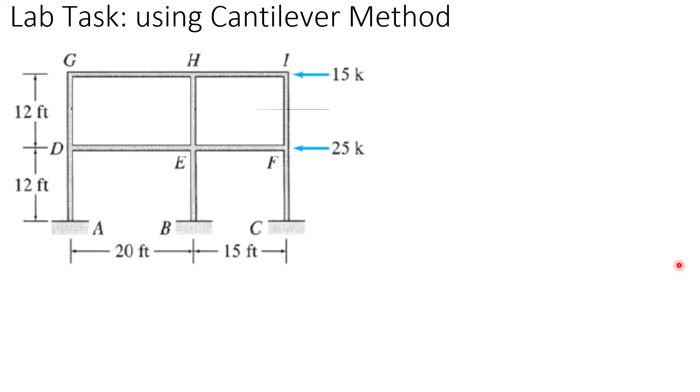Kunin muna natin as per the concept ang centroid ng frame. Cut tayo sa ibabaw, at diyan ang kuhanan muna natin ng centroid. Anyway, kapag nag-cut naman tayo sa ilalim, sa ground floor, eh ganun din yung magiging centroid nito. Since wala naman binigay na cross-sectional area ng column, so iisipin natin na constant lang ito.

And let's say the area of each column is A. So i-cut natin dun sa mga internal hinge sa column. And ganito yung magiging ano niya. Meron tayong 15K sa taas with the mid height of 6 feet because this is 12.

The next one is to get the centroidal axis from the left. So dito ako magre-reference sa left side. So the total area times the moment arm over the total area. Ganun lang yan. So from the reference point, this is my first A.

So 0 yung kanyang moment arm dyan. Then dito sa second column, A din yung area times the distance from the reference, 20. And then area last is 35 naman from the reference over the 3A total area. So we have X bar of 18.33.

So from the left column, itong part na to is 1.67 feet. Then we will conclude that this axial force sa Fi is tension. Nate-tension siya, and ito rin nate-tension siya. So this side is the tension side because the load 15 is going to the left. So it tends to push the frame.

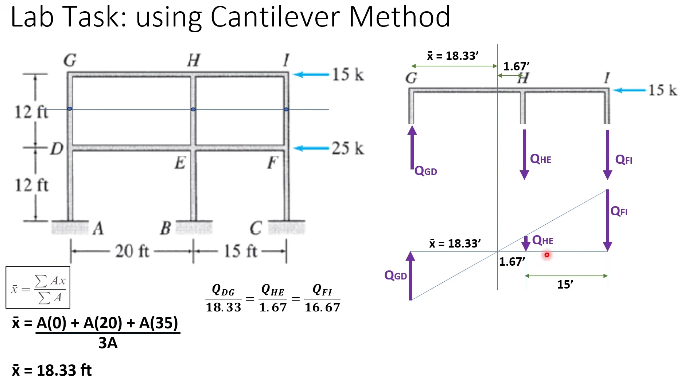So using similar triangles, the ratio in proportion, we can say that QDG over 18.33 is similar with QHE over the 1.67. Then it's also equal to QFI over its distance from the centroid, 16.67. Ganun lang yung gagawin natin.

So pwede nating i-ayos ng ganitong form, in terms of QDG. Then kunin natin yung value ng QDG if we take moment at this point. Gusto ko dito muna ako mag-moment, para itong QFI is madalas locate, or makaka-cancel sa moment.

So QDG, if we take moment at J, counterclockwise positive, ganito yung magiging moment equation natin: 15 times 6 feet, 6 feet ito, is positive. Then minus QDG going to I or J, which is 35. Then this will counter then QHE times 15.

So tignan nyo mabuti, that QDG in terms of QDG, ang ating QHE, edi substitute natin yung QHE in terms of QDG. Same lang din yan if I take moment dito naman sa kabila, para lang malesin natin substitution. So we have QDG as 2.676, 0.244, and QFI is 2.433.

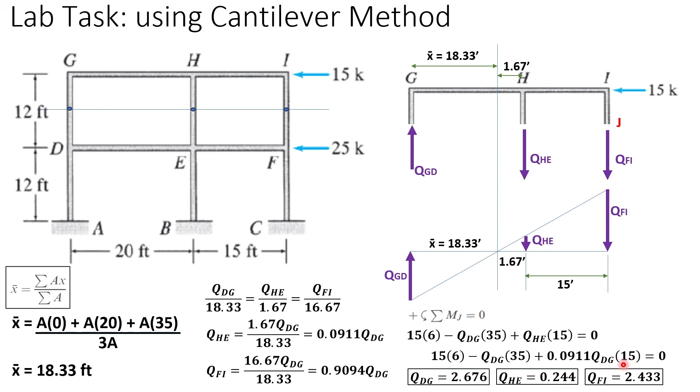So ang ginawa ko, nag-store kasi ako dyan. Depende kasi sa pag-round off, may mga variations ng sagot, so magkakaroon tayo ng konting differences kapag nag-direct ka na round off. Anyway, nasa concept na rin naman yan, parehas lang din yan.

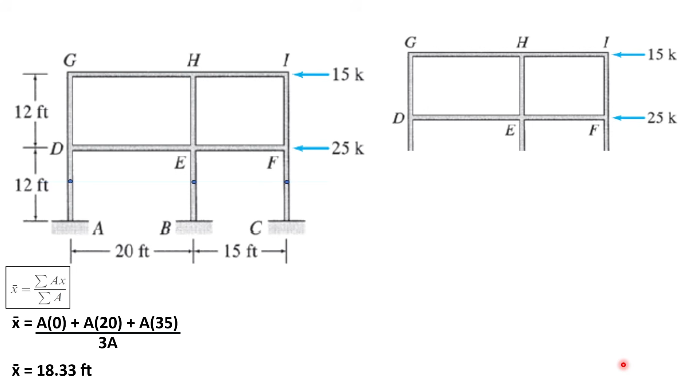So punta tayo sa ground floor. Sabi ko nga, if I cut a plane at the ground floor at the mid height, same lang din yon ng magiging centroid. Same lang din yon. So parang ang mangyayari, magpapalit lang tayo ng axials kasi nasa baba na tayo. So if that's so, ganyan yung magiging ratio and proportion natin ulit.

In terms of QAD naman, makakuha tayo ng BE and CF. Then if I take moment at J, the internal hinge dito sa may F, FC, ganun din counterclockwise sa J. Papalitan lang natin yung, yan, yung 15 kanina, nadagdagan lang ng 25 times 6. Yung 15 naging 15 times 18, 12 plus 6. Yun, and yun lang.

Mag-take the moment si BE at si AD. Substitute the value of BE in terms of QAD, then get the QAD. Again, store kasi yung mga values ko. So technically, yan yung pinakamalapit.

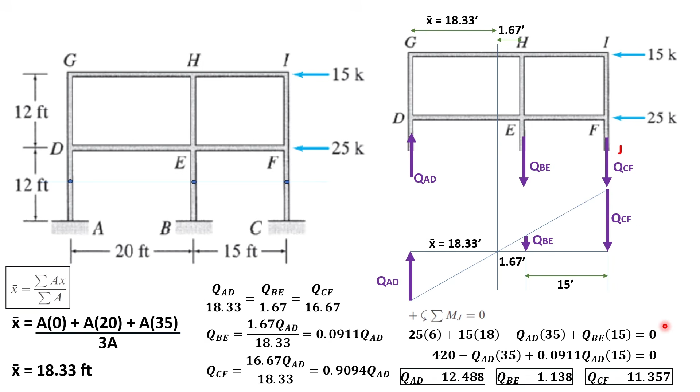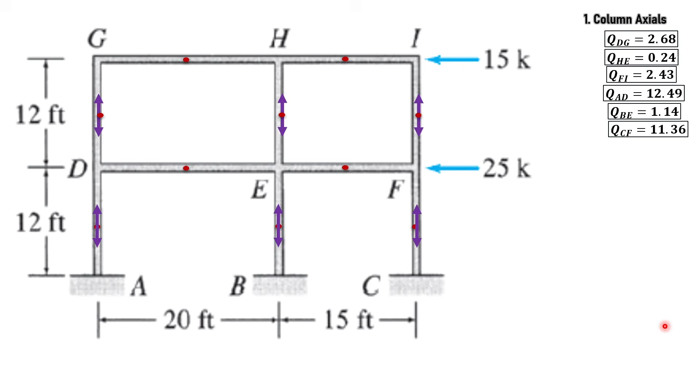Ngayon, pwede na akong mag-direct method on finding the member forces. Kunin lang natin muna, step 1, yung axials ng column, which is yung kanina. Ito sila lahat, pwede ko siya ipwesto dyan, yan lang ang ganyan. So direct method na tayo, para mas mabilis tayo. Understood lang natin na sa bawat member ng column, ang axial is ito. So technically, kung compression or tension, you will just logically interpret that.

Depende sa position ng loading natin, and sa palagay ko magigets nyo na yun. Kung sineparate natin, halimbawa, yung IF, ang 2.43 is the magnitude of your axial force.

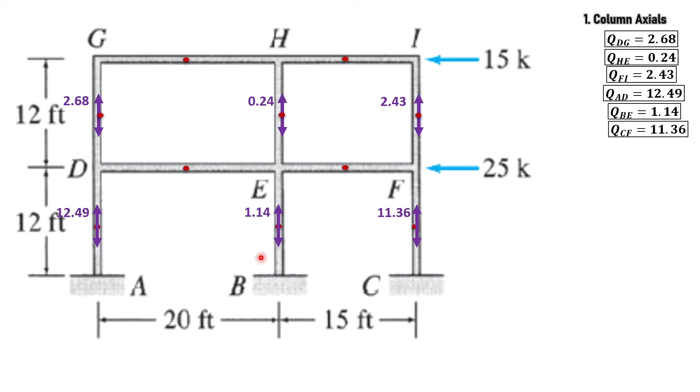Ngayon, ang tanong, compression ba ang nararanasan niya or tension? Dahil sabi natin kanina, the loads here tends to push the frame, therefore ang buong column na ito is experiencing tension. Ibig sabihin, in tension yung IF, in tension din yung CF, hanggang sa ang reaction mo dito is in tension. Ganun din ang mangyayari sa HE at saka BE, in tension sila. And then this one is in compression.

So now, next sa column axial forces, ang susunod mong gagawin is girder shears. Itong 4 na girders na ito, isalin natin yung ating mga forces. Uunahin natin dito sa GH. Kung ano yung axial force dito, supposed to be will transfer on that.

Walang kahirap-hirap yun, 2.68. Next tayo dito sa HI, isasalin mo lang din ito since 2 bays lang naman yung frame natin, 2.43. Next, punta ka na sa DE. Ang DE, hindi mo pwedeng isalin si 12.49 sa ground floor, lipat mo dito gaya ng ginawa mo dito.

May effect kasi si 2.68. If we transfer that here, magsusubtract yan para makakuha ka ng girder shear dito. So it's just 12.49 minus 2.68. Gawin mo na lang pattern - dito rin, 11.36 minus 2.43, equals 8.93.

Ayos. Pagdating sa shear, kung isa-separate mo naman yung HI, kasi syempre nakaganito yung ayos natin. If you look at your references sa book ni Kassimali, nakalinaw doon kung pataas ba yung 2.43 tsaka pababa. Ang understanding lang naman yan, to simplify the understanding.

If you take HI here, to know if the upper one is yung 2.43 is up shear and down shear. Tandaan natin, ang shear is parallel naman sa cross-section, either up or down, the shear is same magnitude. Hindi siya katulad ng axial force na you should know kung tension or compression. Sa shear, wala tayong problema sa ganun.

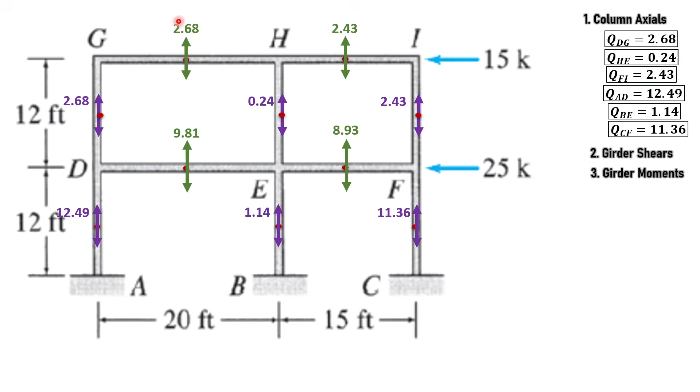Okay, later on ma-address natin yung kung pataas o pababa yun kapag nag-separate na tayo at kapag nakuha na natin ng girder axial forces. Tapos na tayo sa girder shears, let's go with girder moments. Kapag nakakuha ka na ng shear, matik, makukuha mo yung mga moment dito. It's just shear times the half of this length of the beam, which is 10.

Tapos dito, 7.5, let's try. Tandaan natin, tip ko sa inyo, na kapag ang loads given here is tends to push that on the left side, it will counterclockwise turn. Ibig sabihin, lahat ng ating girders will follow the flow of that push, while the column will counteract.

So therefore your girder shears, I mean girder moments, should be counterclockwise. Lahat ng girder moments ay counterclockwise. Para lang malaman mo yung magnitude, 2.68 times 10, equals 26.8. And sa buong girder, GH, yan lang din ang ating moment. Same direction, same magnitude.

Next, punta tayo sa HI. So 2.43 times 7.5 equals 18.23. Napapadali yung trabaho natin ngayon, basta't huwag kang lalayo dun sa concept.

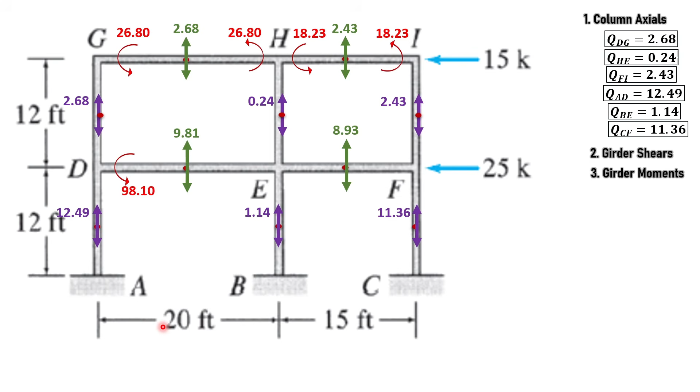Next, sa girder naman ng DE and EF: 9.81 times 10, transfer mo lang dyan. And then 8.93 times 7.5, transfer mo lang dyan. So meron na tayong 4 na moments, girder moment. Anong next?

Let's go with the column moments. Para makuha mo yung moment sa column, titingin ka sa mga kanto sa taas, ito saka ito, which is very easy, transferable na lang yan dito sa kabila.

But in different rotation or direction na. Kung ito ay counter, this should be clockwise. Sabi ko nga sa inyo kanina, to counteract the effect of these loads, kung counterclockwise ang effect ng dalawang ito, lahat ng column mo should counter the counterclockwise, which means clockwise yung mga columns. Ganun din dyan sa baba, at sa isang element, sa isang member, iisa lang ang moment nila.

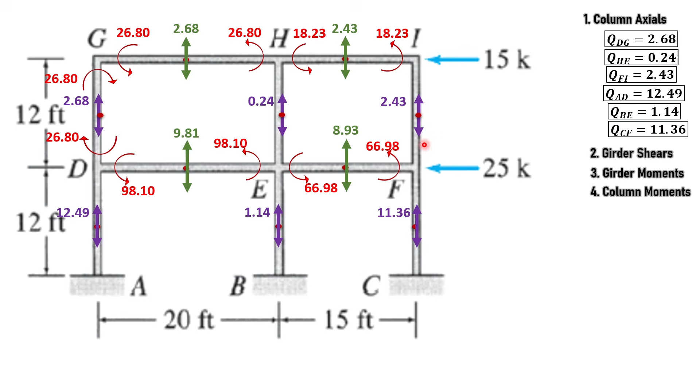So 26.8 clockwise. Then punta ka sa FI - oops, nauna to. Anyway, punta ka sa FI, 18.23, same lang doon. Ganun. Then nagpakita na nga to.

Bakit naging 45.03 to? Kasi ika-counter niya naman itong effect ng dalawang moments sa taas, which is same sila ng direction, therefore na-add yung kanilang moments, 18.23 plus 26.8. So to balance that effect, kailangan mo ng clockwise dito na 45.03, which is the sum of these two, and then transfer mo lang yan dito.

O diba? So bawat joint ngayon, nagkakaroon ka ng equilibrium. Baba na tayo sa column DA. Sa column DA, naging 71.3 clockwise ito to counteract the effect of these two. Since magkaiba sila ng sign, ima-minus mo lang yan: 98.1 minus 26.8 equals 71.3. Punta ka ngayon dun sa baba, i-transfer mo lang din, 71.3. Punta ka sa kanan, ganun din ang gawin mo.

I-minus mo lang itong dalawa. Magkaiba silang direction, so minus. Pero pag aalisin sa isip, clockwise lagi ang column mo dito. Kapag ganito ang formation ng load, which is 48.75.

Yan lang, and meron na lang tayong huling column, BE. So to balance everything here, to make it 0, lahat ng para sa direction, i-add mo. So 98.1 counter, 66.98 counter. Ito lang ang nag-iisang clockwise, so ito lang i-add mo. 98.1 plus 66.98, i-minus mo ngayon yung may ibang direction, which is 45.03.

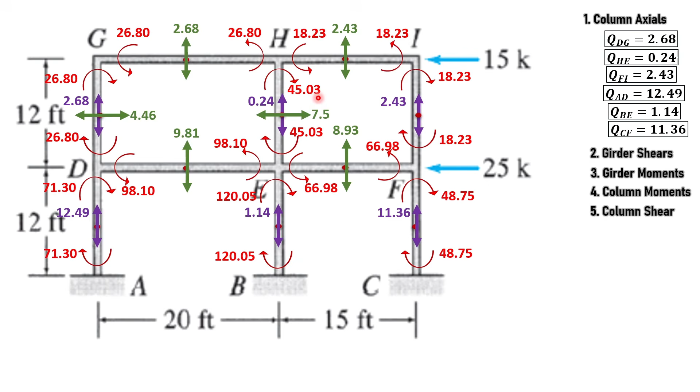Now, next is column shear. Dali lang yun. Dahil may moment ka na, ang sabi ng concept, ang moment, divide mo lang yan ng mid-height ng column. Tapos, yun na yung shear. So, 26.8 divide 6 equals 4.46. Dito naman, 45.03 divide 6. Next, 18.23 divide 6. Okay?

Column shear sa baba. 71.3 divide 6 equals 11.89, 120.05 divide 6, almost 20. And then 48.75 divide 6 equals 8.13. Okay? Dito na tayo sa panghuli.

Girder axials. Kailangan nating focus sa mabuti yung mga kanto natin, yung mga kanto na yan. Okay? So, ibig sabihin dito, uunahin ko yung sa HI. Ipwesto ko ng ganito yung axials ko. So, either way, hindi mo pa alam kung tension or compression ito.

So, mamaya papaliwanag ko. Ngayon, i-cut ko lang ng konti doon sa mismong hinge, yan, at joint I. So, parang pwede mong i-imagine na lang to sa isip mo dito kahit wala na nga itong scratch, pero for the sake of this lesson, mag-scratch ako dito. So, sabi ko kanina, malalaman mo kung pakaliwa o kanan, depende sa moment na naka-apply doon sa beam and column. So, tignan nyo yung nandito.

Siyempre, pwesto mo muna yung load. May load na 15 dito. Kailangan magkaroon ng equilibrium dito in terms of x-axis. So, meron na tayong axial shear dito, column shear na 3.04. Ang tanong, pag transfer ko ba yan dito sa hinge, kaliwa o kanan?

So, para malaman mo yun, tignan mo yung rotation ng column. 18.23 clockwise. Therefore, to counter that, kailangan mo ng pakanan na shear dito, to counter the effect of clockwise. So kailangan mag-counter yung 3.04.

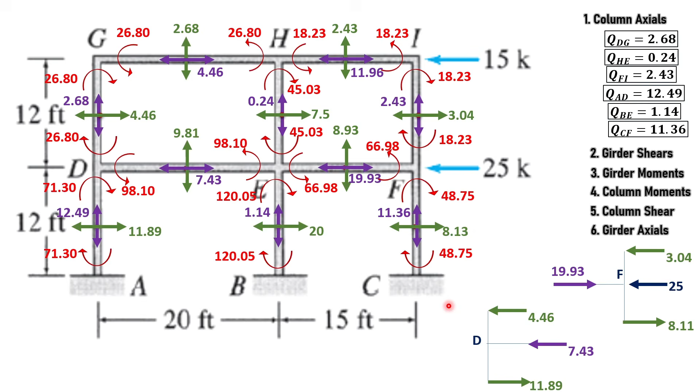Now, forget the reaction sa support, yung axials dito, ito yun. And, to counter the 15 and 25, so ito yun, 11.89, 20, 8.11. Galing din yan sa dito, sorry, 8.13 to, 8.13. So, pag in-add mo to lahat, dapat equal to 40.

Okay, next. So, kung ito ay counterclockwise, lahat ng moment mo sa support should be clockwise. Yan, kakopyahin mo lang actually itong mga nandito. And we have the final answers, so itabulate lang natin, at ito yung mga final answers.

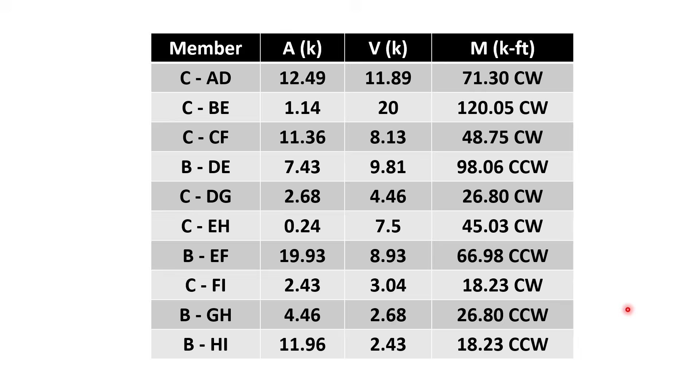So, dyan nagtatapos yung solution natin sa cantilever method ng frame na ito. For more practice, tingin kayo sa book, marami sa net, and try the straightforward or direct style of computation.